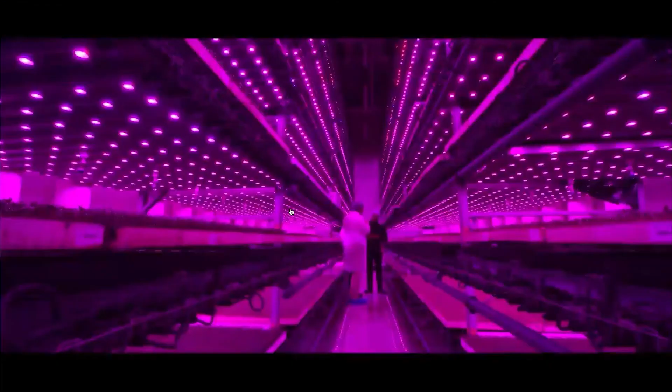Energy Observer is the first vessel autonomous in energy that doesn't emit greenhouse gases or fine particles. This electrically propelled boat of the future works thanks to a mix of renewable energies and a system of hydrogen production by seawater electrolyzers, fully decarbonized, decentralized, and digitalized. First French ambassador for the Sustainable Development Goals, Energy Observer has undertaken an incredible odyssey for the future, to meet the pioneers reinventing economy, mobility, agriculture, and housing, building a more supportive world and finding solutions to protect biodiversity. More than a boat, Energy Observer is a true media for the planet, a documentary series, 100% positive digital media - Energy Observer Solutions, which will promote the 17 Sustainable Development Goals to the general public.

With Energy Observer, we are proud to contribute to the energy transition. We are proud of making the maritime community one of the pioneers of a cleaner world.

As you can see, Energy Observer is not only a laboratory ship, it is a group carrying more than 60 engineers, technicians, and executives with different missions. First, the Odyssey carrying our energy transition and hydrogen ambassador mission. Energy Observer Foundation carries the pedagogic and expertise mission about the energy maritime transition. Energy Observer Production is in charge of producing the documentary films broadcast by Canal Plus Group. And the last project, EODEV, developing affordable and renewable hydrogen solutions for onshore and offshore applications, which Louis-Noël will introduce shortly. Let's get back to our floating laboratory.

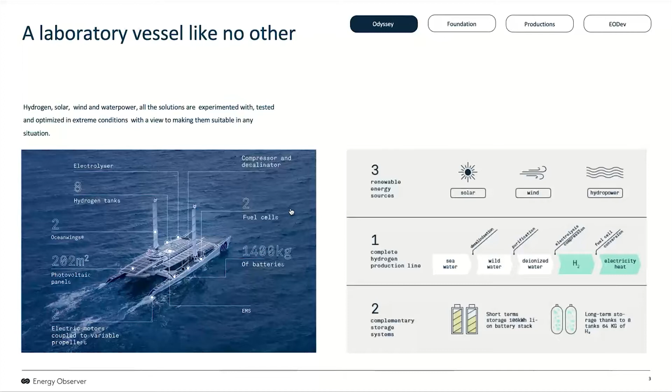Energy Observer is more than a boat. It is a scale model of tomorrow's energy world, a floating, decarbonized, decentralized, and digitalized smart grid.

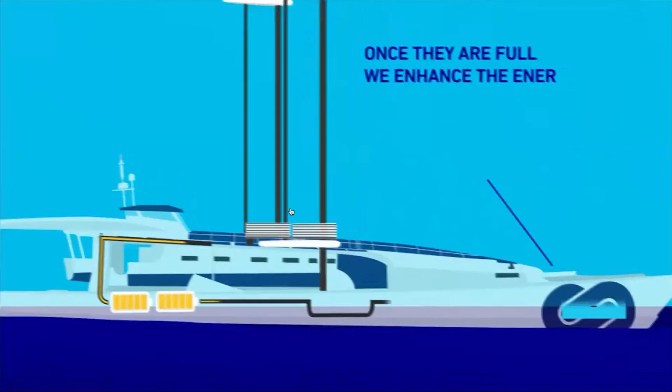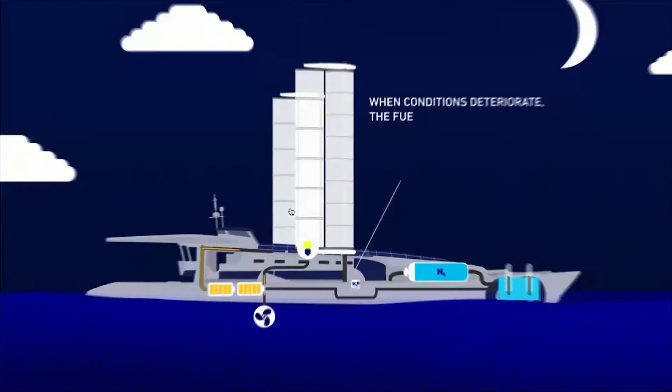How does it work? We charge our batteries with solar panels and hydrogeneration. When they are full, we value the surplus energy by producing hydrogen from seawater. The game is to balance propulsion and onboard life consumption directly with the renewable energy available. When the sun and wind deteriorate, to extend our autonomy, the fuel cell converts our hydrogen into electricity.

Here is our energy mix. Solar energy is the leading source of power on board Energy Observer. In total, we have 202 square meters of solar panels with 35 kilowatt peak power.

Different technologies are developed on board to optimize the surface available: flexible panels able to fit to any curved surface, anti-slip panels on the deck on which the crew can work, vertical and colored panels that can fit almost everywhere, and bifacial panels. These panels can catch the sun rays on both sides, including the deck and water reverberation.

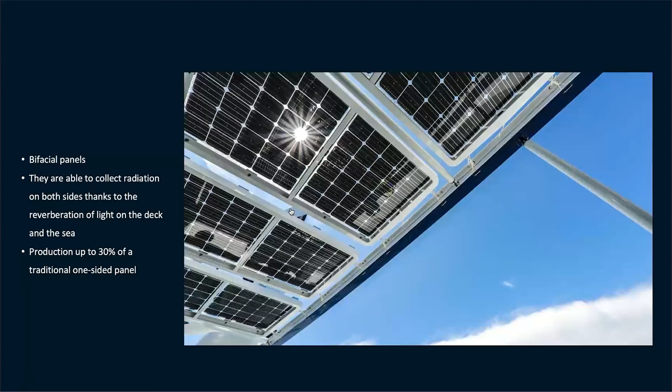Another advantage, the cells are naturally ventilated, and this allows them to provide a higher efficiency. At the end of the story, these panels offer 30% more energy than traditional flat monofacial panels.

During the first navigation from 2017, Energy Observer tested vertical wind turbines to produce electricity and a giant kite to reduce our consumption. The system did not match our expectations.

Since 2019, the ship has been equipped with a pair of OceanWings, combining the advantages of both wind turbine and kites. With this innovation, we save energy, and in favorable wind conditions like trade winds, we can even produce hydrogen while sailing. It is a concrete step to reduce the environmental impact of international maritime transport.

Following the forecast on a wide panel of ships, the results are very promising, from 18 to 42% of energy saved.

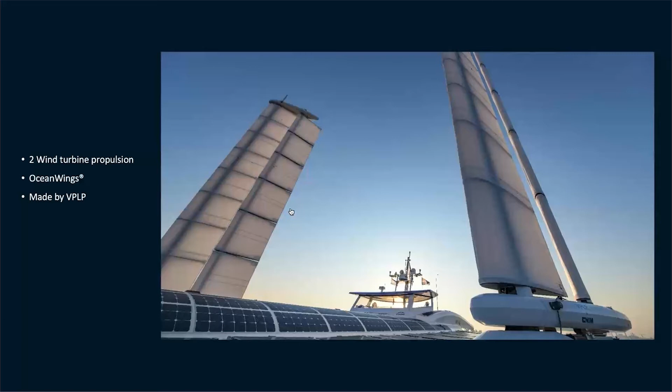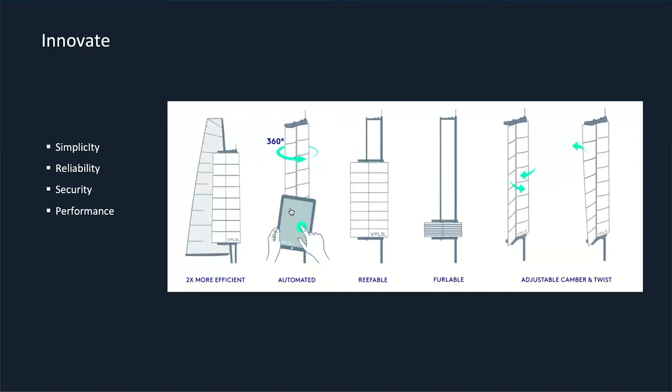It is a safe twin propulsion system, simple and fully automatic, based on the America's Cup rigid wing technologies, 2 times more efficient than a traditional rig, fully automated and piloted from the wheelhouse. No sails, easily maneuverable. They can be furled automatically to face wind conditions, with fine adjustment available in automatic mode.

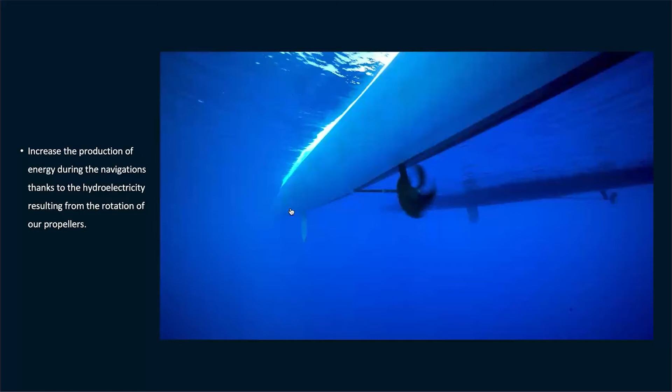They will allow us to raise our energy production while sailing using our reversible propellers, and our electric motors turn the other way around and produce electricity up to 8 kilowatts.

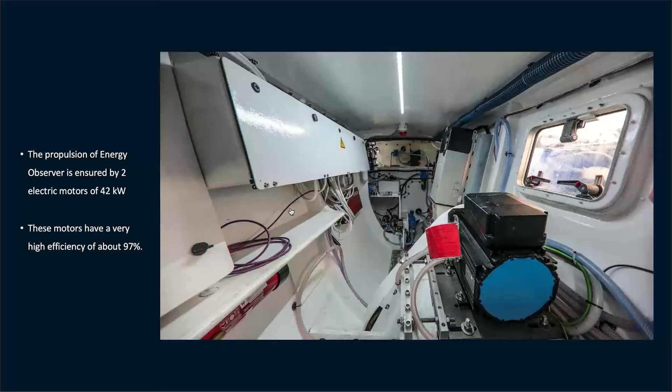The Energy Observer propulsion is carried out by 2 electric motors of 42 kilowatts, and these motors are very efficient, with about 97% efficiency.

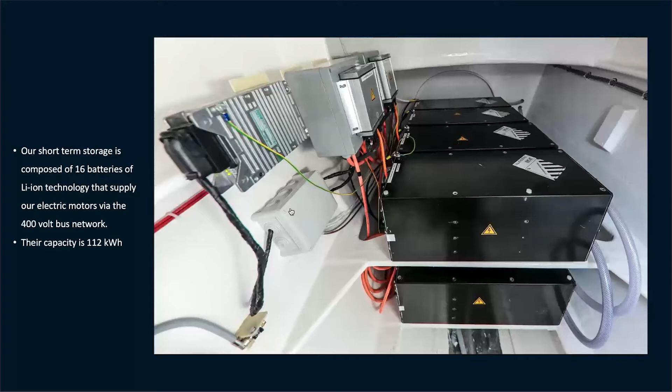Our short-term storage is based on 16 Li-ion batteries feeding our motors via the 400 volt bus network, and they can store 112 kilowatt hour, but their weight is 1,400 kilos. Let's talk about our hydrogen chain with our production system from seawater.

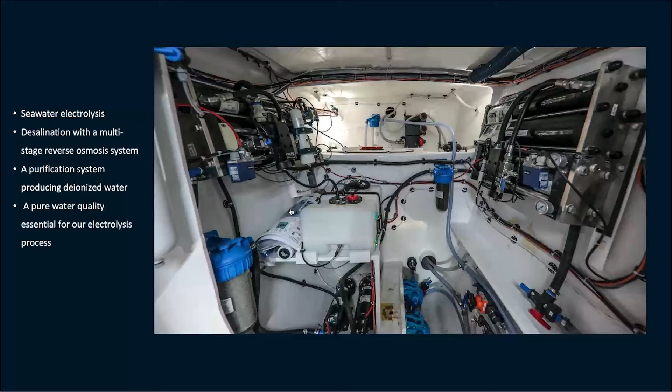First, we desalinate the water with a multi-stage reverse osmosis system. Then the water gets deionized to obtain a very pure water suitable to be electrolyzed.

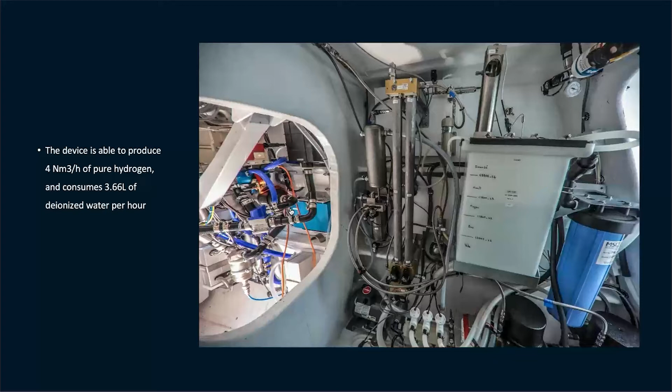Electrolysis uses electricity to split the water into hydrogen and oxygen. Our electrolyzer can produce 4 normal cubic meters of pure hydrogen per hour and uses 3.66 liters of deionized water per hour.

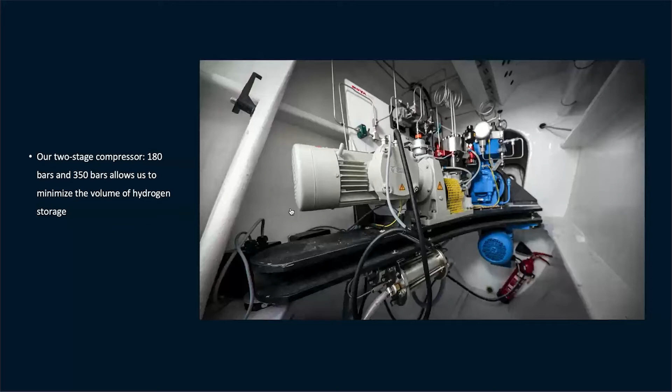Hydrogen is 14 times lighter than air and takes a big volume at 1 bar. So our compression system uses 2 stages, 180 bars and 350 bars, to reduce this storage volume. Even if the 700 bars norm would provide nearly twice as much energy for the same volume, we did not go to it for energy consumption reasons.

Our long-term storage is based on 8 tanks of 332 liters each, storing 62 kilos of hydrogen in total, as much energy as 230 liters of gasoline. They are fitted on the deck and benefit from natural ventilation, and we have a forced ventilation system in case of any leak.

This volume brings a total storage of 2 megawatt-hours, 1 megawatt-hour of electricity, and 1 megawatt-hour of thermal energy that we store for the heating system and the hot water for the crew.

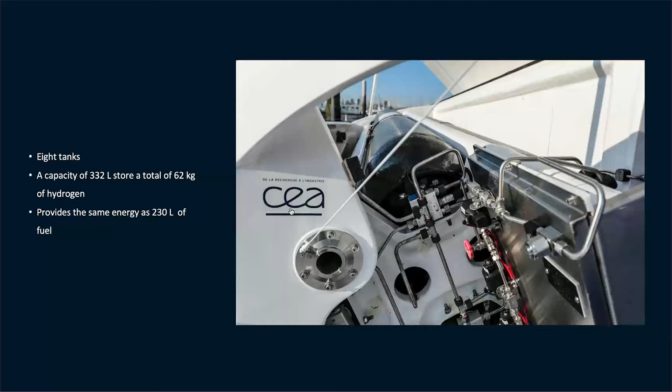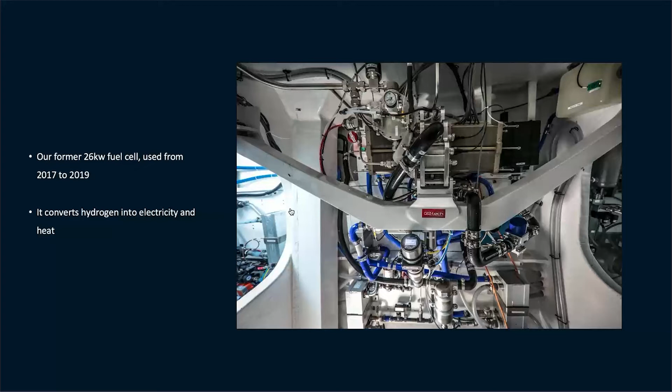Here is our previous fuel cell developed by the CEA in France, producing 26 kilowatts of heat and electricity. And since the launching of EODev in 2019, we have installed the REXH2 system developed by EODev and Toyota. I can testify that we have used this system for more than 15,000 nautical miles, and that it is very reliable and efficient.

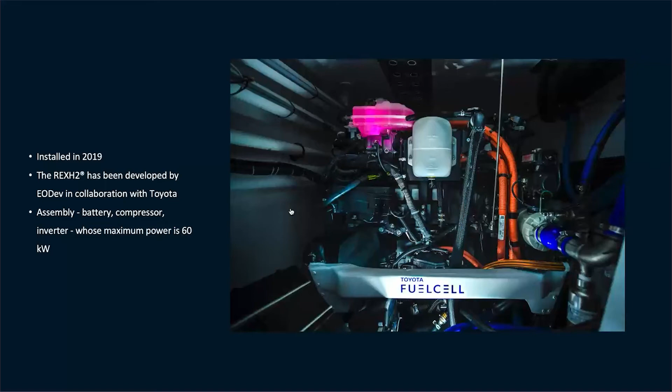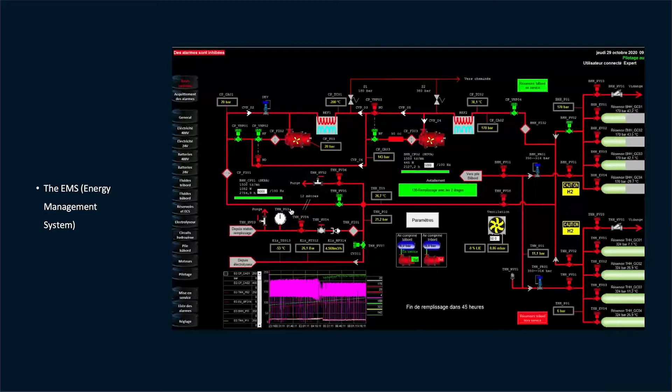Here are our two monitoring touch screens. It's our energy management system, the brain of the ship, based on a series of automations driving all the systems on board. 21 grafcets connected to 200 alarms and more than 1,000 sensors, 12 analogic and 13 digital actuators. We collect more than 1,050 data on the network hub in real time. This is the wheelhouse, and this is the living area leading to the 6 cabins.

So after having presented our ship, let's say a few words about the Odyssey. It started in 2017 with the first navigations around Europe. We made a tour de France to get the technology reliable. We wanted to stay close to the engineers because it was a world premiere to have an electrolyzing system on board the boat. Then we went to the Mediterranean in 2018 to test the systems with very high temperatures, up to more than 50 degrees Celsius, in Israel and Tunisia for instance.

Then we just went around Northern Europe in 2019, including the challenge to go north up to Spitsbergen, north of the Arctic Circle. Then 2020 arrived, a very strange, very weird year, with the Atlantic crossing and a long stopover in the Caribbean during the pandemic. So the crew had to stay about 2.5 months in total autonomy because they didn't have the right to go anywhere anyway.

So altogether, we have organized more than 60 stopovers in 28 countries. We have sailed more than 30,000 nautical miles, about 35,000 now, and we have welcomed more than 300,000 visitors in our 450 square meter village, which followed us everywhere around the world, except this year because of the pandemic that we cannot bring our big village with us. So we come along with the boat and with the crew.

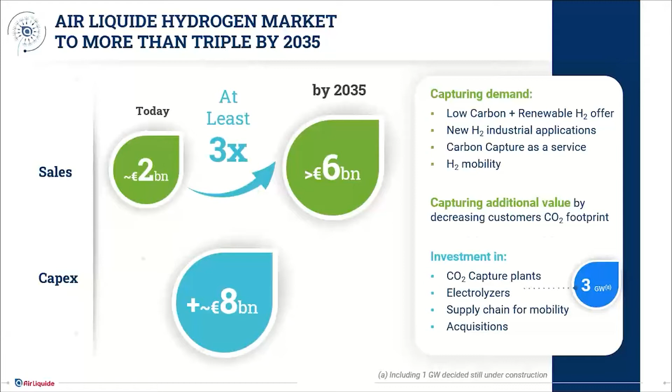We're not just talking about the future, we're also talking about the activities we're doing today. Air Liquide has been in the hydrogen business for about 75 years. We produce 1.2 million tons of hydrogen per year today. We have thousands of miles of pipelines and many large production facilities. We're just getting into the electrolyzer business with our first major 20 megawatt project, and as I said, about $2 billion of sales in hydrogen.

I'd like to point out 2 examples of projects we've already committed to and started in the Americas. In the northeast United States, at Bécancour, Canada, in Quebec, we have our first project for very large electrolyzers up and running, producing renewable hydrogen into the markets today. In November of last year, we brought this system online, and as of January this year, it's in full production mode. It was a $42 million investment in a 20 megawatt PEM electrolyzer, with nearly 100% of that electricity being renewable hydropower from Canada. It produces about 8.5 tons per day of hydrogen, strengthening our supply of renewables into the Northeast.

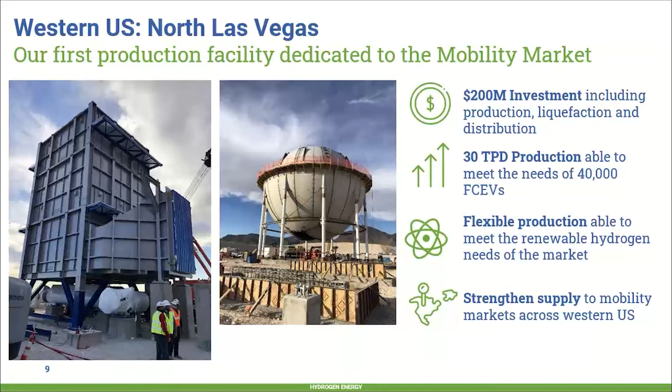Great, thank you Dave, thank you for the presentation. I'll just say personally, thanks for the new production plants, East and West. Keep them coming, we love that.

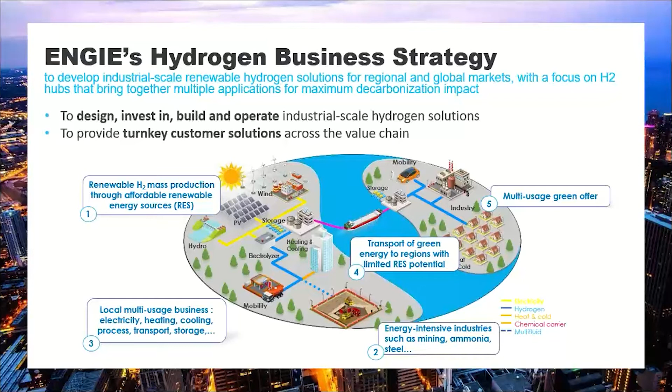And finally, the transport systems and the infrastructure needed to support widespread hydrogen usage simply make more sense when they're shared, and that also leads us towards the hub model.

Our vision is that hydrogen will develop massively in the coming years, but to realize that vision, it's necessary to be really laser focused on cost. Engie has chosen to be a hydrogen integrator working across the entire hydrogen value chain from renewable energy to transport and delivery, because through control of that integration process, we are able to optimize each of the building blocks along it.

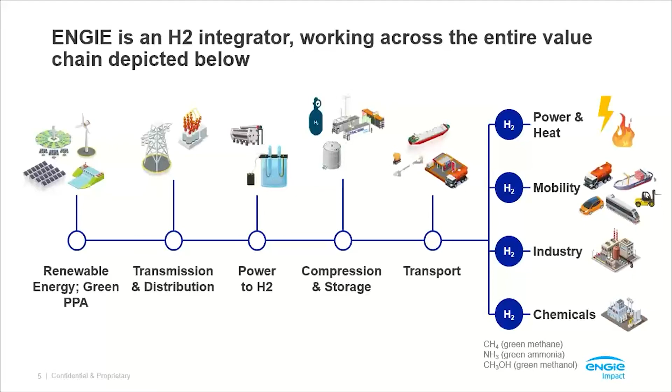I know I'm running out of time, so I'll end here with a quick scan of some of my favorite Engie hydrogen projects globally. The Zero Emission Valley project in particular, we are partnering with Michelin on that and the local government. In that project, we're putting in place 20 refueling stations, each with their own on-site electrolyzers.

The Yuri project in Australia is a co-creation of the first green ammonia production plant globally. The Rhino project in South Africa, we're co-creating the first hydrogen mining truck solution. And the Jupiter 1000 project in France is one of two projects that we're running or have run where we've been blending hydrogen into the natural gas infrastructure to prove that it is safe for use in residential homes.

Those are just a few examples. This space is expanding really rapidly, and I'm leading Engie's hydrogen business development in the US, and I'm really overrun by interest from companies beginning to integrate green hydrogen into their decarbonization plans. Anywhere from small scale pilots for utilities to our largest in development now, which is 30 tons per day, a 71 megawatt electrolyzer system.

So there's a lot of range in what they're doing, but they and we are very focused on policy incentives that help us get projects over the line to implementation. And that's one of the reasons that we love projects like Energy Observer, which help inspire us to accelerate our focus on decarbonization and prove that zero carbon technologies, including hydrogen, aren't just something to hope for in the future. They're here today, and we just need to put in place the incentives to really take them to scale. Thanks very much.

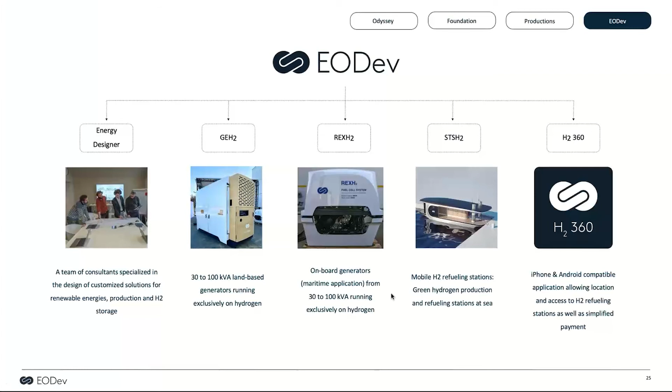We have different kinds of cooling systems on board. Energy Observer, of course, uses a water system, a liquid cooling system. In this genset we developed, it's air induction which cools the system. This genset has been sold to some ports and harbors in France, and it has been sold to some renting companies like Loxam. Loxam, Aggreko, all these companies are using thousands of these gensets at big events.

For us, the goal is to be there for the Paris Olympics in 2024, because we need a lot of power in the street, in the center of the city, and they don't have enough power out of the grid to power everything. So we are working hard to have a sufficient number of these units for the Paris Olympics.

Then we have the maritime application. We have launched the boat that you see here. It was at the Monaco Yacht Club some months ago, the first pleasure craft. Actually it's a taxi boat, because in the Mediterranean you've got many marine protected areas now where you cannot get in with a diesel engine. So there is a rush of all these professional taxis and pleasure craft to find solutions. That was the first one, and this boat is called Hynova.